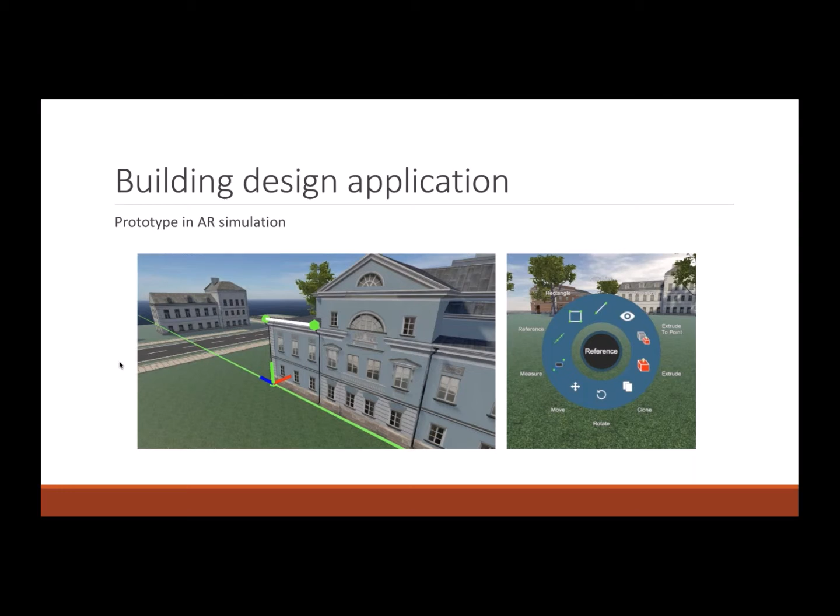So to avoid all the practical issues of how can we do this in AR with current technology, we prototyped it in VR just to see how it should work and what the interface should look like and so on. And so that's what these screenshots are of. But then we went ahead and we did implement this in the HoloLens.

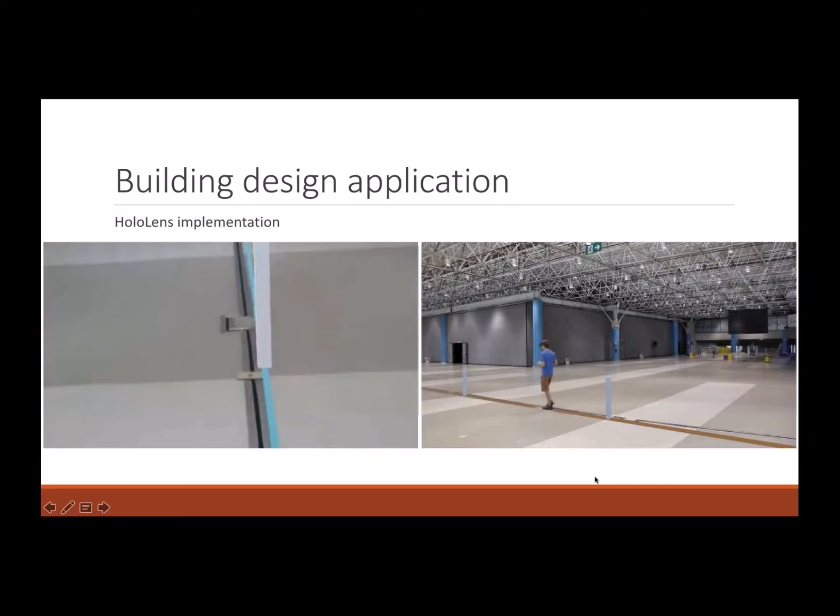And so I'm going to try to play these two videos simultaneously, which is not always the easiest thing to do. And what you see here is kind of a first-person view through the HoloLens, and then a third-person view from another HoloLens, actually, that's capturing this.

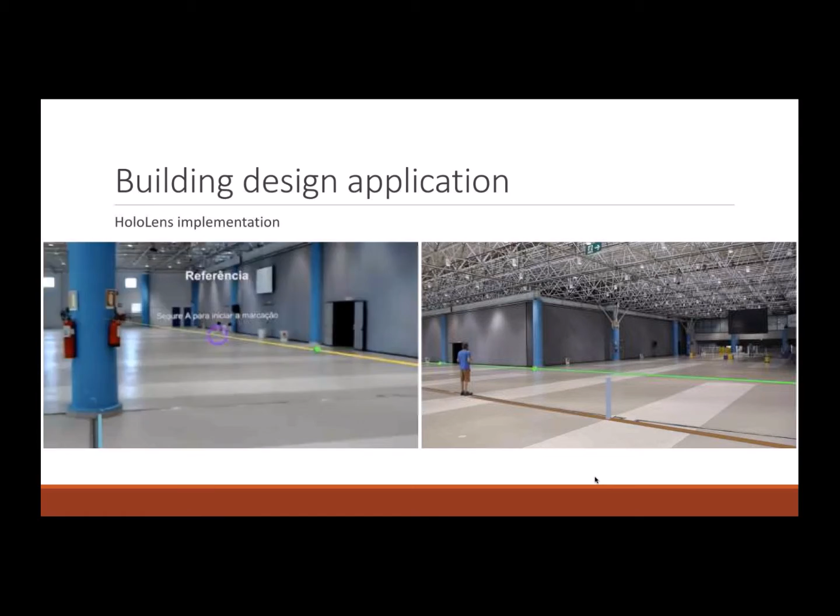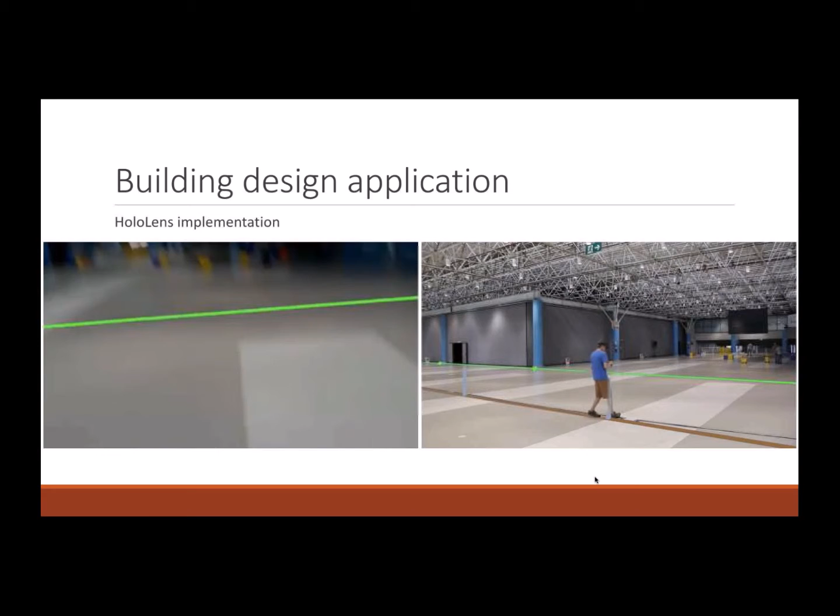And so the way this application works is you mark real-world points using the VectorCloud technique. And you can see the user has just marked a couple of real-world points and created a reference line based on those. So that reference line tells you, here's some geometric information from the real world that is going to be useful in constructing the building that we want to make, the new building that we want to create.

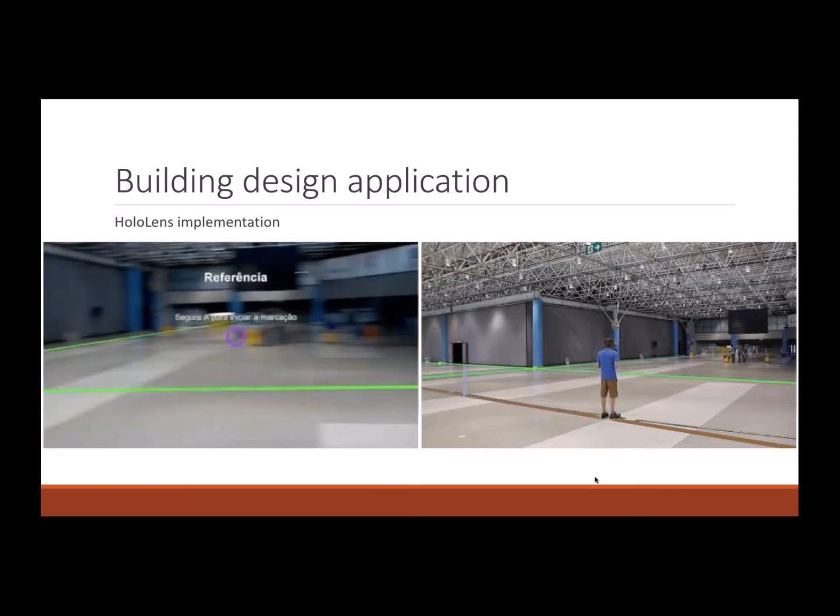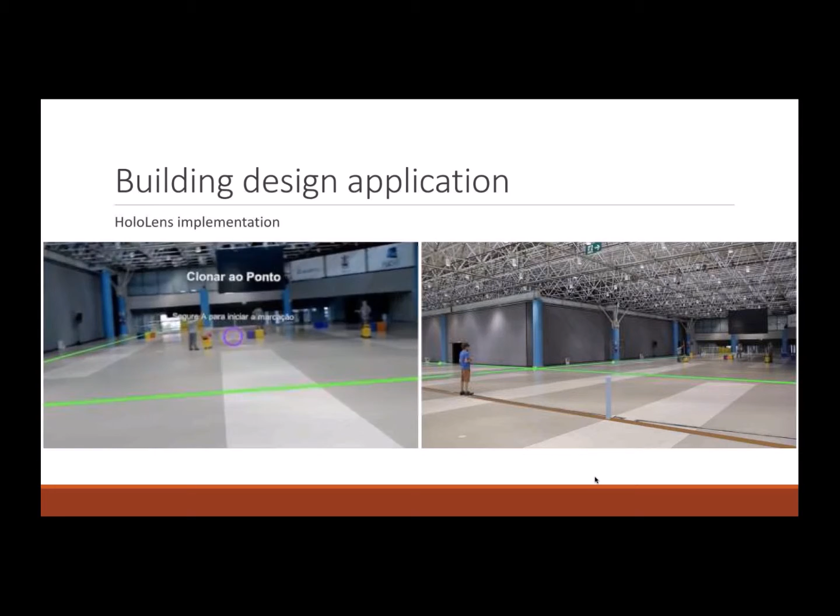A couple of notes here as he continues to work. First of all, you can see that this is done indoors, and so again, that was just to avoid some current limitations of the HoloLens, but in a large indoor space that's kind of like being outdoors. Second of all, you can see that he's only walking back and forth between two kind of fixed points in the real world that are marked with these white columns. And that's to avoid tracking inaccuracy with the HoloLens. So we always know exactly where the user is standing. So it's more of kind of an ideal AR situation.

And thirdly, you'll note that the interface is in Portuguese here. I don't know if any of you read Portuguese, but this was a student of mine who was from Brazil, and he did the work here at Virginia Tech and then went back to Brazil and ran the study there.

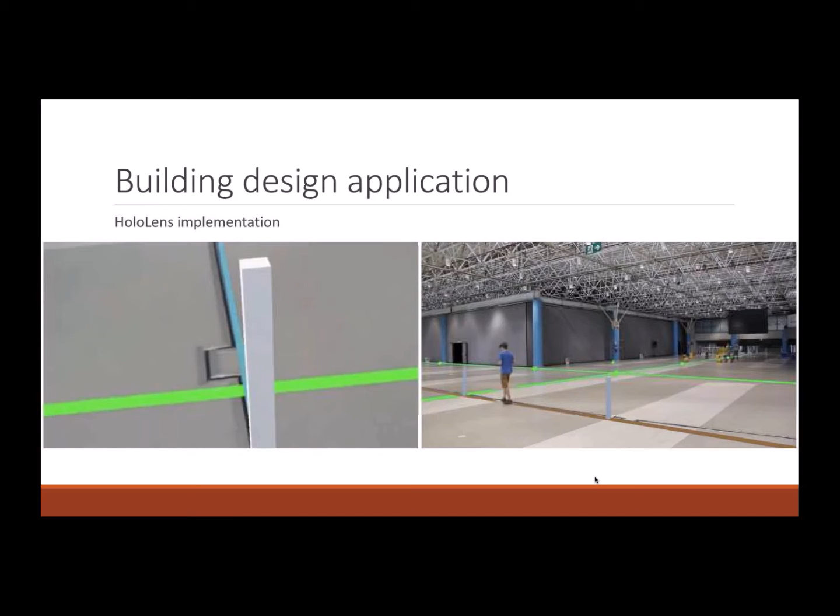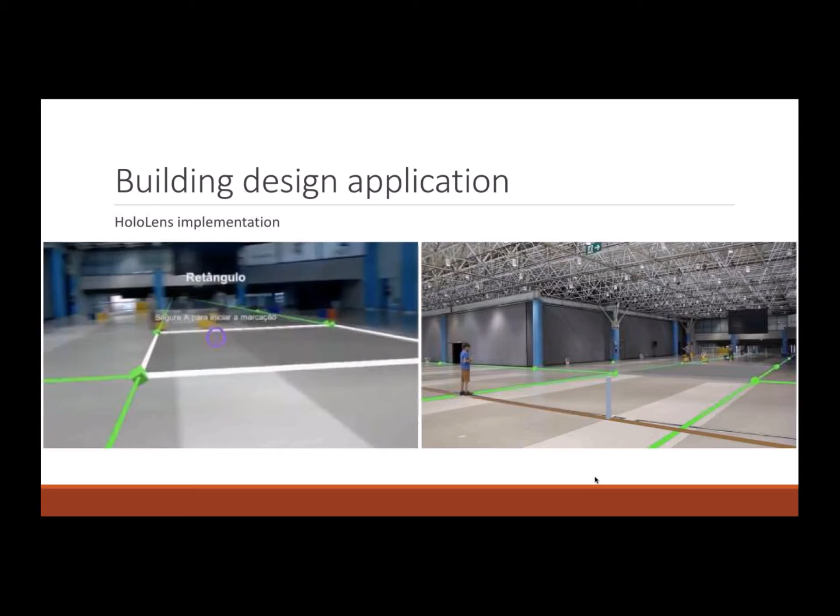So anyway, what he's been doing is creating these reference lines, and now he has moved one of the reference lines to align with another feature in the environment, this column kind of down at the end of the space, and he's then cloned that to make two parallel lines. Now, using intersections of all those lines, he's created a rectangle, and he's going to split that rectangle into two parts. This is going to be the footprint of his proposed building.

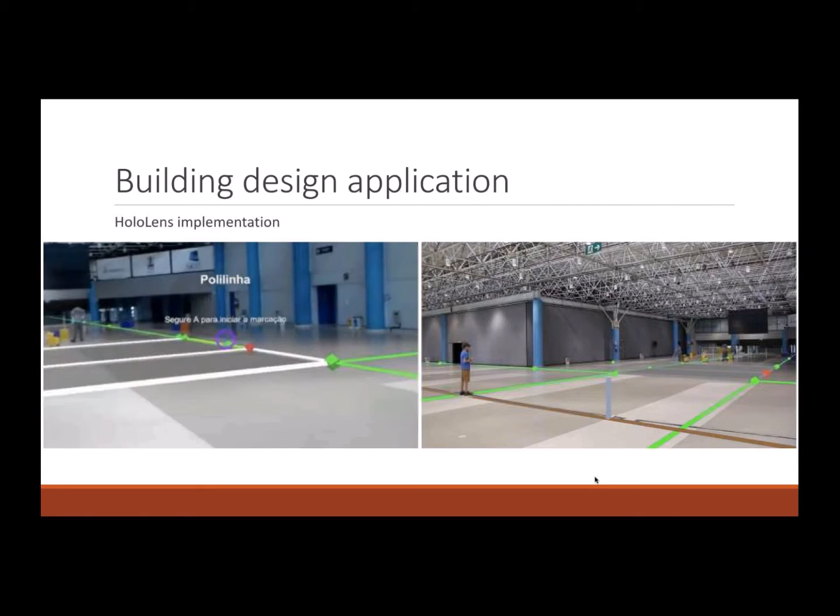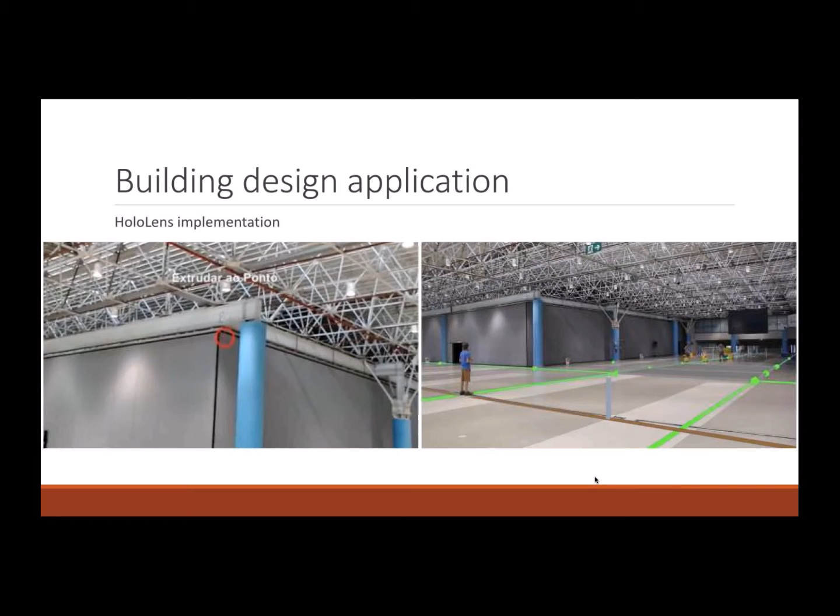And then finally, he's going to extrude the two kind of sub-rectangles to different heights so that we have a 3D building. And so this first extrusion, it's called extrude to point. So he marks a point in the environment that's at the height he wants the building to be. And once that point is marked, then he can select the rectangle, which will automatically be extruded to that height.

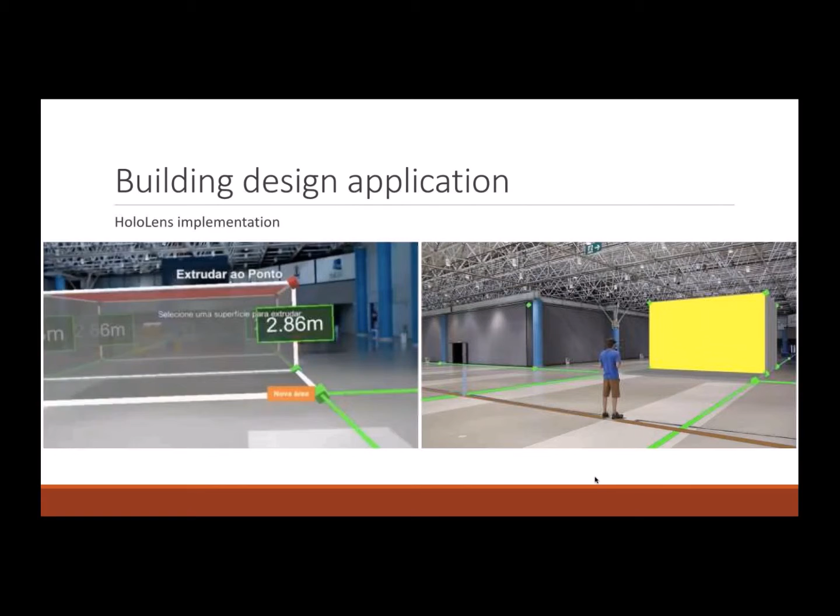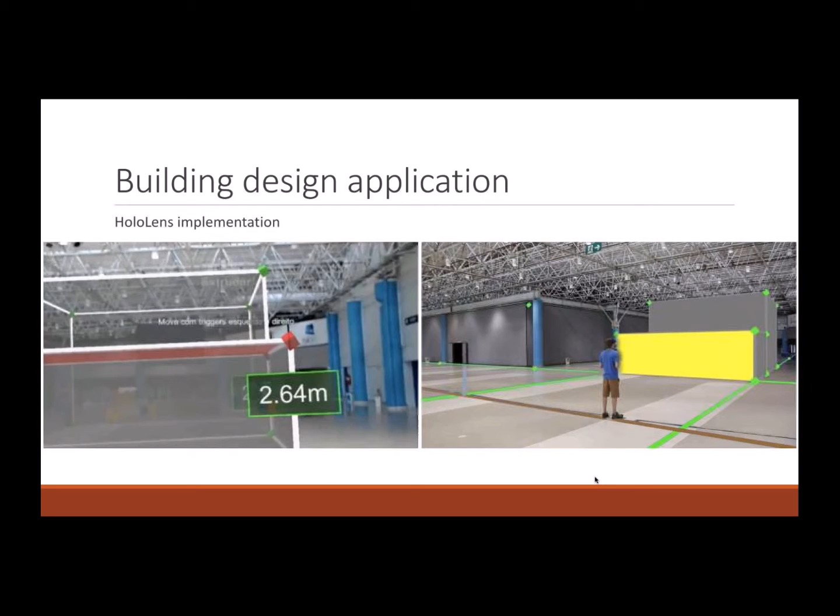So this is a way of, again, making a building that's aligned with existing real world features, not only in the kind of two-dimensional footprint, but also in its height. And then the second part he extrudes just manually to a given height. Okay, so I hope you kind of see how that works.

We ran a study again with this, and what we wanted to see was how the precision of the 3D point marking technique affects the results. And so on the left, you see buildings that were created by users who were using the basic geometric technique to mark points. And on the right, you see buildings created by people using VectorCloud.

And so it's kind of interesting, the people using the geometric technique did not do poorly when they were marking the real world points. But as the errors from those points got cascaded and amplified as you used them to create the geometry of the building based on those real world points, you can see that the result is not that good. But with VectorCloud, we get pretty consistent results that an architect might actually be able to use because they're precise.

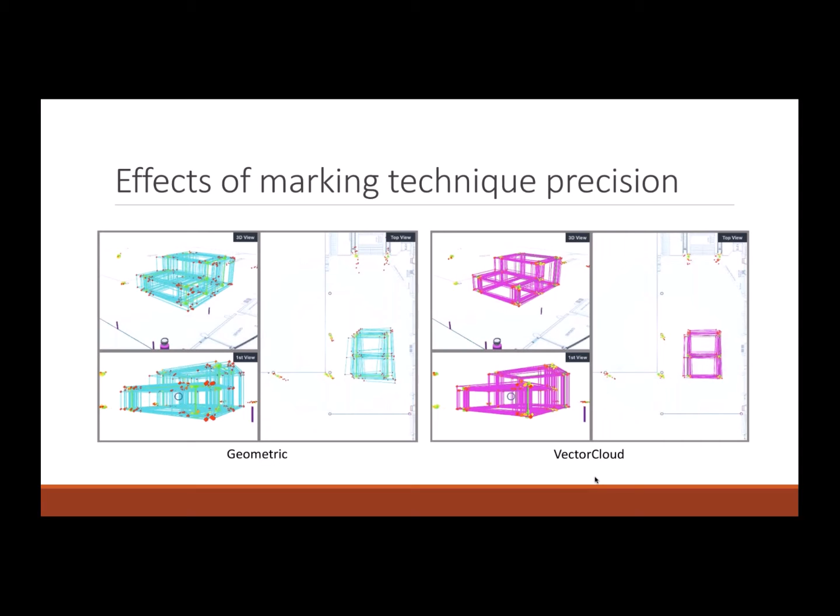Okay, last thing I'll talk about is, let me just pause this video for a second. We're thinking again about model-free AR when we don't have information about the geometry of the real world, and we want to enable not only single user applications, but also collaborative applications. And so if you're working with someone else and you're both in AR, you want to be aware of what that person is doing, and in this particular case, what they're looking at.

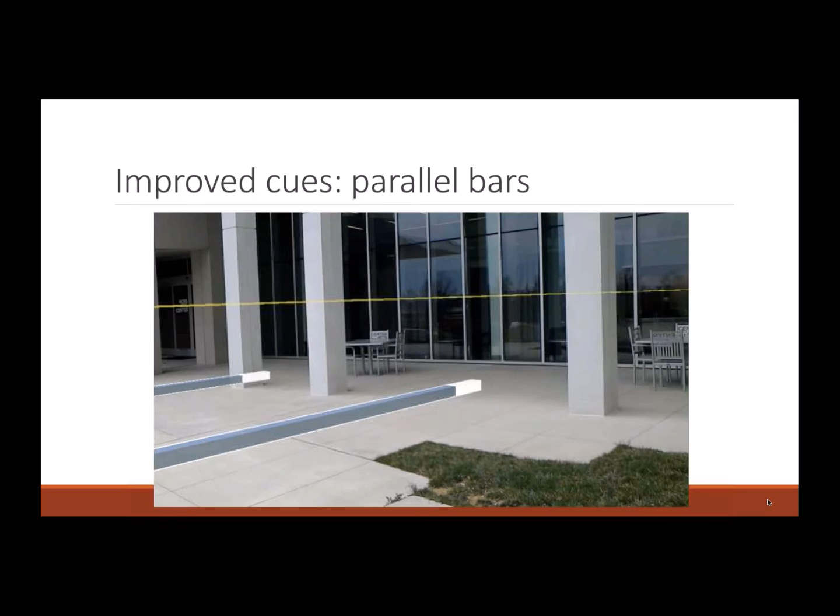A second thing we tried to do is to provide better spatial information. And so here's a visualization that we recently came up with. It's called parallel bars. I'll play this video. Sorry, it's got sound as well. The idea is that we provide these virtual bars that extend from me. So you can see I can use my arm to kind of point in that direction, but that are all parallel to the gaze ray of my collaborator. And this gives me some better spatial information to make up for the fact that I don't have occlusion.

And then of course we can combine those together. So here's the double ray with the parallel bars. So we're doing a study on this now. I don't have results from it, but we expect that our improvements will really help people to understand better what their collaborator is pointing at.

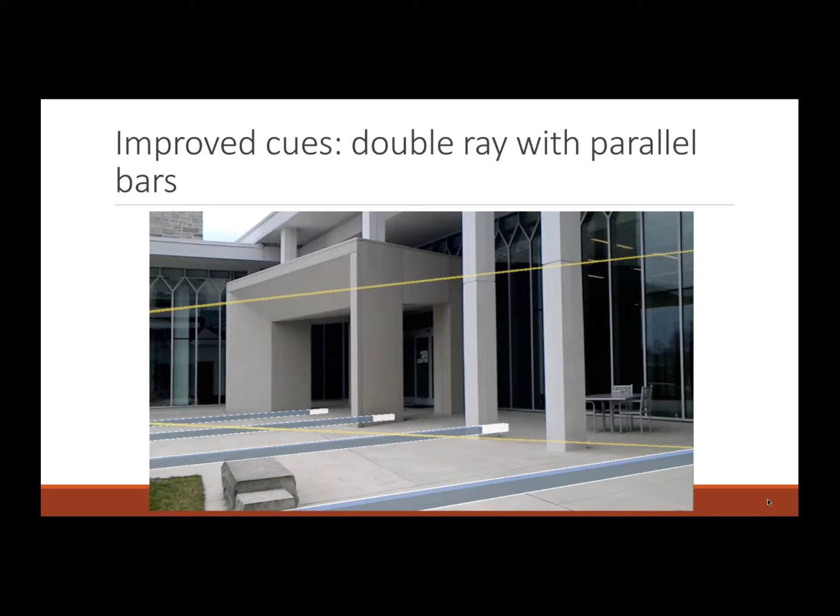Okay, so last slide, just some take-home messages from what we've done here. First is, don't rely on human perception for placement of virtual content. It can look correct from one location, but without occlusion and without seeing it from multiple locations, it's really hard to tell if you've got the content in the right place. So these marking techniques based on geometric triangulation that we've shown do a better job of placement.

Also, we showed that when you are doing any sort of 3D pointing at a distance with your head or your hand, you need to mitigate the effects of tremor by using techniques like multi-sampling or image-based techniques like the ones I showed. Thirdly, if you're in a model-free setting, which is pretty common, I think, outdoors, you need to provide extra cues to make up for the lack of occlusion, like the double ray or the parallel bar that I showed.

And then finally, some practical take-home messages. I don't want to wait to prototype and evaluate future AR applications. I know architects are not going to use HoloLens today to do building design, but I think they might use a similar sort of technology in the near future. And so I want to be able to do research on that now so that there's some lessons learned when those applications need to be built for real. And so to do that, we have to work around current technological limitations.

So I've shown you ideas like using simulated AR based on VR technology as one prototyping and evaluation platform. Secondly, like in the building design video, find a large-scale indoor location as a proxy for outdoor use. You can recalibrate user position to known locations, like the blue columns that I showed in those videos.